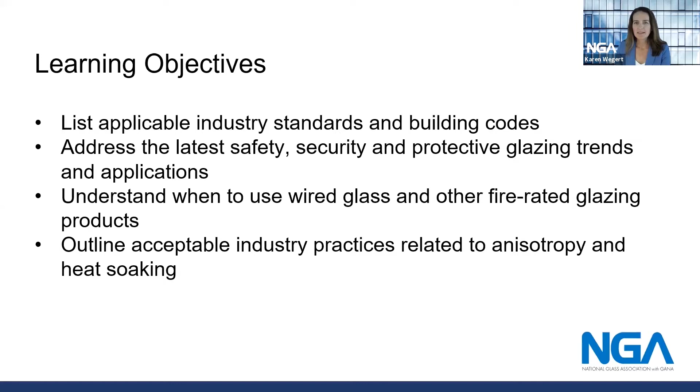This session is all about glass, questions from architects. We asked our NGA member companies what questions they hear most often from the architects they work with. These questions encompass a wide range of topics, including building codes, safety glazing, how to select the right fire-rated glass, and understanding anisotropy and heat soaking of tempered glass.

Please allow me to introduce to you the NGA advocacy and technical team who will be responding to your questions today. Tom Zaremba of Roetzel and Andress is NGA and GICC's fire, structural, and safety glass consultant. Tom has more than 30 years of experience representing Fortune 500 companies in civil litigation and financial institutions in restructurings, reorganizations, and insolvency proceedings. Tom's practice focuses on advising and representing clients in all aspects of the development of building codes and standards, including proceedings before the US DOE, the US EPA, the International Code Council, and numerous other forums.

Next, Dr. Tom Culp is the owner of Birch Point Consulting, located in La Crosse, Wisconsin. After earning a PhD in chemical engineering from the University of Wisconsin, Dr. Culp has spent the last 21 years in the glass and window industry in the areas of energy efficient glazing and window performance, low-E glass coatings, and building code development. He currently represents the National Glass Association, the Glazing Industry Code Committee, and the Aluminum Extruders Council on Energy and Green Construction Codes.

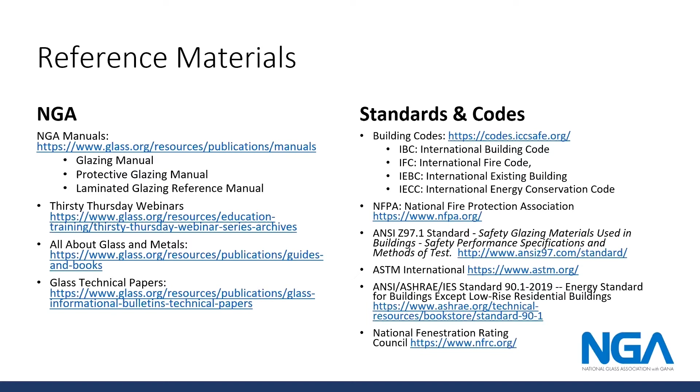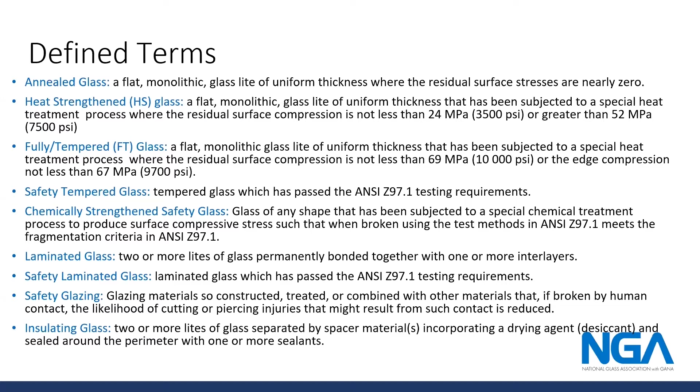We will be referencing many sources today, so we've compiled them all here for you. You received this in your digital handout before the conference, so feel free to refer back to that, and these are all live links that you can use to go directly to these resources as we talk through them. We also compiled a list of terms that are commonly used in the glass industry and how those are defined. So we won't go through those one by one today, but feel free to look back to your digital handout whenever you need to refer to these.

All right, let's get to our questions now. Our first question is, where can I use wired glass and where is it not allowed? Good morning, Karen. This is Tom Zaremba. I think I can probably answer that for you.

Wired glass can be manufactured in many different ways, but there are 2 primary ways when you're trying to resolve the question of where can I use it and where I can't use it. One is in its monolithic form, and that is simply rolled wire glass, which consists of annealed glass with a wire mesh embedded in the center of it. Another way to manufacture wired glass is to apply an organic film to either one or both sides.

And if you have monolithic wire glass, you have to be very cautious with it for the reason that it will break safely only if it is impacted at 100 foot-pounds or less. That's not a great deal of impact. The two categories that ANSI Z97.1 uses are 150 and 400 foot-pounds of impact force. So if you're going to try to use monolithic wire glass, you have to remember that it's banned in any hazardous location.

Excellent. Thank you, Tom. Our next question is, what is anisotropy? Is it inherent in the process? So Karen, I'll take this one. So anisotropy is also known as iridescence, and it's the same as strain pattern and quench pattern. Anisotropy, the word itself, is more of a European terminology.

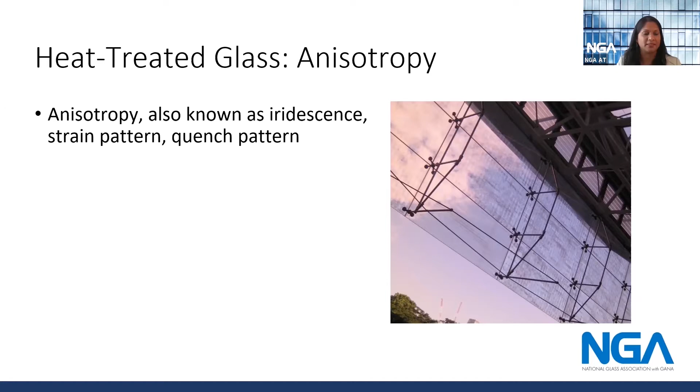So is it inherent in the process? Well, in order to understand that, you kind of need to know the heat treating process. So the heat treating process is when you take the annealed glass and heat it up to approximately 1150 degrees Fahrenheit. And the reason why you do so is in order to get the required resistance to the thermal and mechanical stresses, so that way you have safety glazing in the tempered glass.

So after it's heated up, it needs to be quenched down to cool down the glass. During the quench process, the air is supplied through nozzles or slots to the glass surface. So differing levels of stress on the glass surfaces can occur during the quenching process. And also if there's non-uniform heating in the furnace, it can also contribute to the iridescence or the quench patterns. So that's why when you look through certain types of lighting conditions, you're able to see lines like you have on the screen, or sometimes you're able to see dots on certain different conditions.

So that is anisotropy. So is it inherent in the process? Because it's the way you're able to capture the stresses into the glass, that's why it's always going to be inherent in the process. It's a characteristic of all heat treated glass. And it should not be mistaken as discoloration or non-uniformity of the tint or the color, and it's not a defect in the glass. The strain pattern does not affect the physical properties or the performance values of the glass itself either.

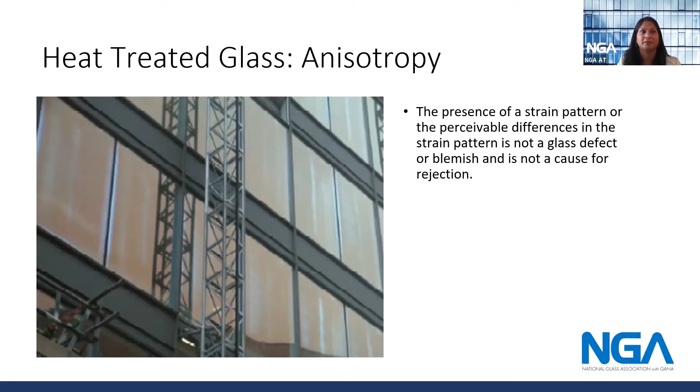In addition, NGA has a document on the iridescence in heat-treated architectural glass that discusses this phenomenon, as well as goes through the different standards that talk about the viewing conditions and what's acceptable and what's not.

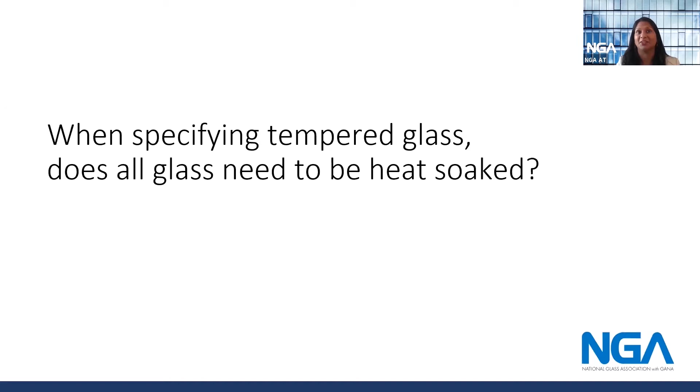Thank you, Ermela. You may want to take this next question too. When specifying tempered glass, does all glass need to be heat soaked? So heat soaking, a very controversial topic. It's important to know heat soaking in glass. So there's basically two testing approaches. Some people require each lite to be tested, whereas others use a statistical approach. So the statistical heat soak testing involves a statistically significant number of glass panels to be tested, as opposed to 100% for a project.

It is important to recognize there isn't a consensus on whether you should have 100% testing or just a portion. So heat soak testing is done on fully tempered architectural glass. It can be done on clear glass, tinted, low iron, patterned, or any type of coated glass. Within North America, there isn't a test standard. However, there's a European standard, EN 14179, that talks about two different types of heat soak. There's inline heat soak testing, and then there's also batch testing.

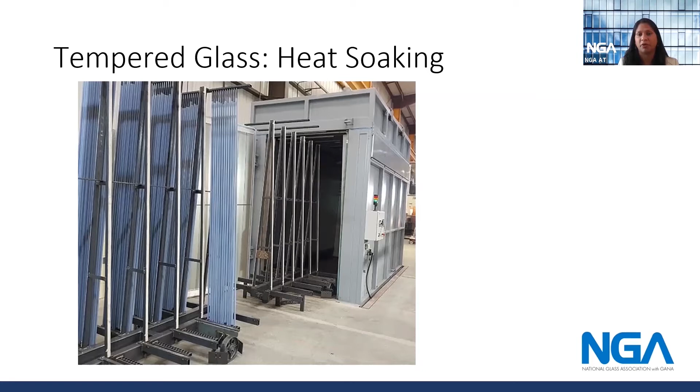In the industry, heat soak is not a guarantee that you're not going to have spontaneous breakage. The idea of heat soaking glass is that if there is going to be some type of spontaneous breakage due to inclusions in the glass, it will break during the process instead of on the site. As you can see on the screen, you have some photos of an actual inclusion with some breakage of the tempered glass, and then you have the oven and how it's being used as well. So that's all about heat soaking.

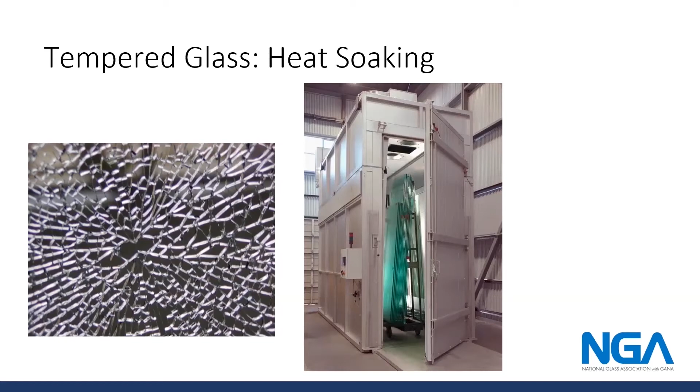So in addition to the information, NGA also has a heat soak technical paper that's on your screen. It talks about the different types of heat soaking, when you should and shouldn't heat soak, as well as some information on the actual batch process itself.

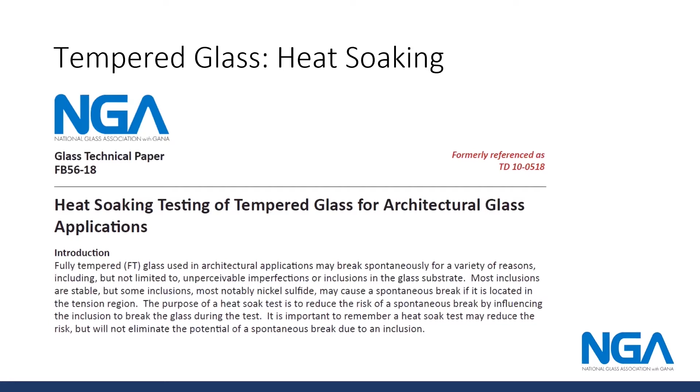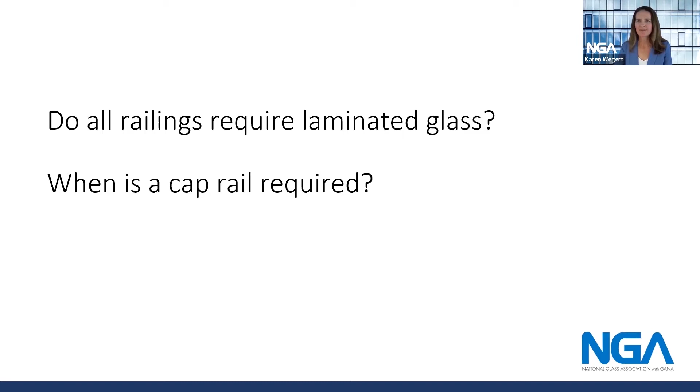Thanks, Urmila. Okay, let's switch gears a bit to a new topic. Do all railings require laminated glass? And when is a cap rail required? I can take that one as well, Karen. The first thing you have to realize is that when you're talking about railings, you're really talking about a defined term that's used in the International Building Code. And that defined term is guards.

It also defines as a term handrails. The term railings doesn't appear anywhere in the code, so just keep in mind that even though it's an industry term, it really refers to a defined term in the building codes as a guard. And the answer to the question, do all railings require laminated glass, or do all guards require laminated glass, is yes and no.

The answer is yes, because Section 2407.1 of the International Building Code requires all glass anywhere in a guard or in a handrail to be laminated and to be fully tempered or heat strengthened glass, which meets either 16 CFR 1201 Cat 2, which is a 400 foot-pound test, or ANSI Z97.1 Class A impact testing, which is also a 400 foot-pound impact test.

The reason that the answer is also no is because there's a single exception to the requirement that all guards and handrails be laminated. And that exception provides that single fully tempered glass may be used in a guard or a handrail so long as there is no walkway beneath it, or if there is, that the walkway is permanently protected. And the reason for this is the potential for, as Urmila was discussing earlier, spontaneous breakage of fully tempered glass.

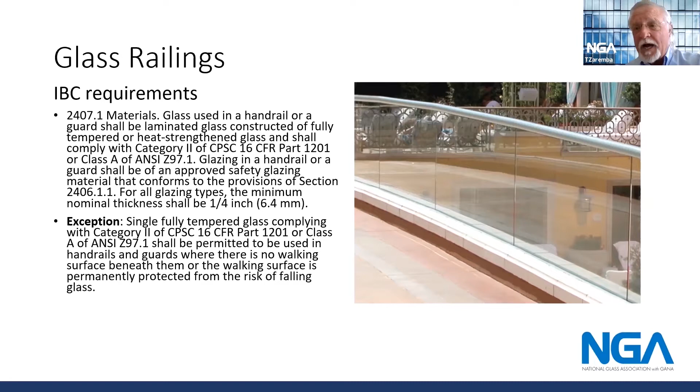Now, the next question was, when is a cap rail needed? There are several types of guards with glass used in them, and one is an infill panel, and the second is typically called a baluster panel. Where an infill panel is used, the glass is in a non-load bearing position and is supported by fixed posts or rails. So the code does not require a top rail when you're dealing with glass that is structured into a guard assembly as an infill panel. That is, it is not load bearing and it is supported by fixed posts and rails.

However, in the situation where you have baluster glass, either panels or other types of glass balusters, the code requires that there be a top rail or a handrail at the top of the balusters that attaches to at least 3 balusters. Now, there's only one exception to that rule, and that is if the baluster is laminated and has been tested to remain in place after impact or breakage pursuant to ASTM E2353. So top rails are required in glass balusters. They are not required in infill panel guards.

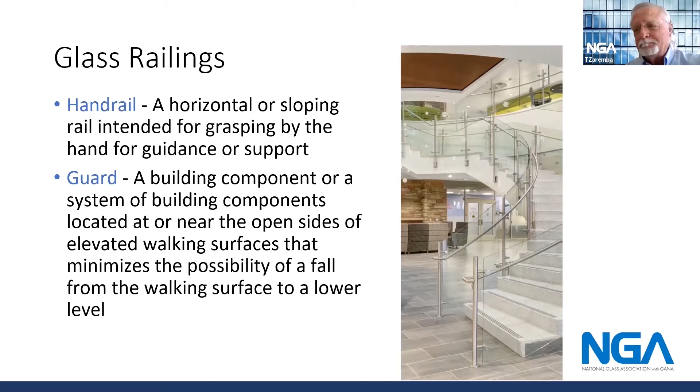Thank you, Tom. Thanks for clarifying that. This next one is a bit tricky. How do I apply the factor of safety for handrails and guards? Do I apply the factor of 4 that they talk about to the 200-pound load or the 50-pound load? How does that work? Okay, let me take a stab at that one as well, Karen.

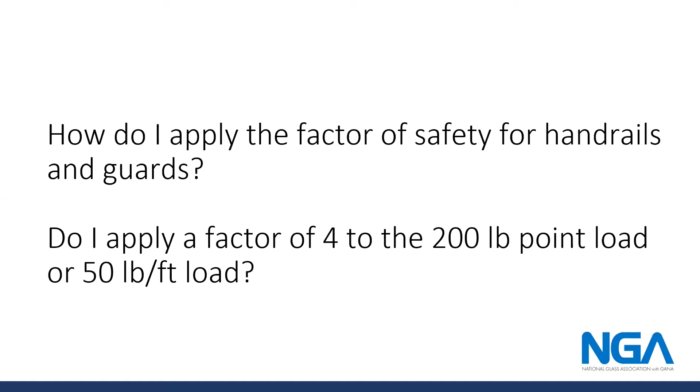Glass guards and handrails under Chapter 24 of the Building Code are required to meet the requirements of 1607.8. And 1607.8 requires that the glass in guards and handrails be designed to withstand a linear load of 50 pounds per linear foot and a concentrated load of 200 pounds. Now, Chapter 24 swings back after you are aware of those Chapter 16 requirements and says, by the way, you have to design the glass to have a safety factor of 4. But when you design the glass, you do not apply a factor of 4 to the design loads.

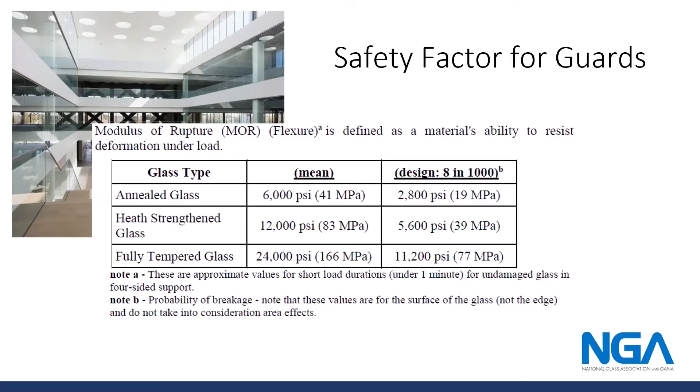Instead, the glass should be analyzed for each load, both the linear load of 50 pounds and the concentrated load of 200 pounds, separately. And the resultant stress should then be compared to the glass strength values, which are published by NGA in a document, FM 05-12-2018. And then those values, as specified in the NGA document, should be divided by 4. So the design stress should be compared to 6,000 PSI for fully tempered and 3,000 PSI for heat strengthened.

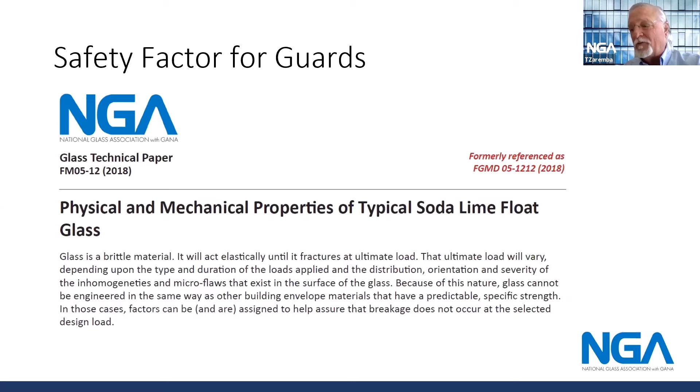As to any other types of materials that are used in the guards, they do not require a safety factor of 4. So if there are concrete, steel, or aluminum components to the guards, those must meet whatever requirements there are in the code for those types of materials in Chapter 16, but they do not have to meet a safety factor of 4. Only the glass in the guard or the handrail needs to meet the safety factor of 4 requirement.

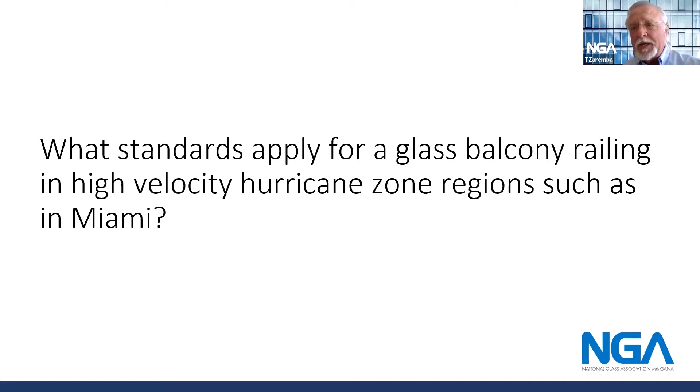Thanks, Tom. Our next question is also about railings. What if the glass is in a balcony railing, for example, in Miami? What do we do then? All right, so Miami's kind of an unusual place. It has windborne debris requirements, and you could have glass guards like this one in exterior applications. But what the code wants to prevent in high wind load areas is for glass handrails on these guards to become windborne debris missiles. As a result, Chapter 24 requires the glass used in exterior handrails and guards to be laminated and comply with Cat 2 requirements of 16 CFR 1201 or Class A requirements of ANSI Z97.1.

Additionally, if the top rail is attached to any other glass in the guard, that other glass must meet the windborne debris impact requirements that are specified in section 1609.2 of the building code. Those are specified for windows and other openings in buildings, but are made applicable to glass in contact with handrails in exterior applications through Chapter 24 of the building code.

I've got a follow-up question for you, Tom. For wind loading on the glass balustrade, do you consider the positive and negative simultaneously? It's an interesting question, and frankly, I'm not aware of any building code provision specifically on this point, but what I can say is that glass balusters can differ in design from vertical posts or columns, which have far less surface area for wind to act on than if a flat glass baluster panel is used in a guard.

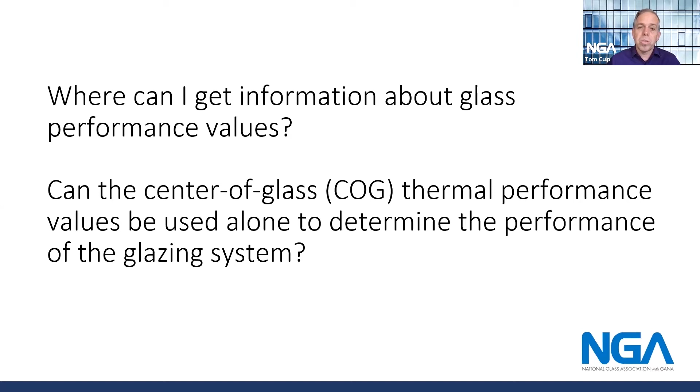Thanks, Tom. Our next questions deal with more on the energy side of things. First of all, where can I get information about glass performance values? And can I just use the center of glass performance values? Okay, so now we're in the area where I spend most of my time, which is energy performance and green building codes as well. So as most people know, the primary energy related performance numbers or metrics that involve glass and windows are the U factor and the solar heat gain coefficient.

And besides, the manufacturers will provide a lot of that data on the glass and the glazing unit in terms of the performance in different configurations, whether it's monolithic or double glazing or triple glazing. Another good source is if you look back in your handouts at the reference materials, there's a link there for the All About Glass and Metals guidebook. And there's some information in there about the different metrics and just general information. But generally, you'll get glass information from the manufacturers themselves. But that is generally for the glass.

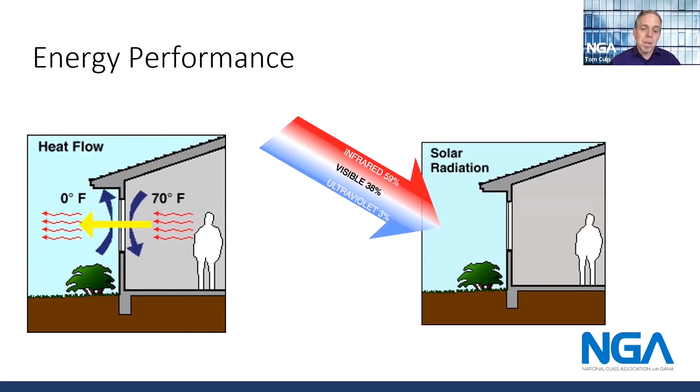And so the second question was, can you use center of glass numbers? And the answer is no. For the energy codes, all the U factors and SHGC requirements are for the whole assembly, the whole window, including both the glazing unit and the framing. And that's because if you ignore the edge, if you ignore the framing part of it, you will miss out on a lot of the impact on thermal performance, as well as other issues like condensation resistance. And so you need to be looking at not just good glass performance, but also the framing system and the spacer system, and looking at things like thermally broken frames and warm edge spacers. And you have to look at the whole numbers for that.

The next question is, where do you get those numbers for the whole system? Because it's easy to find one or the other, but what about together, especially in a case where the framing system is coming from one supplier and the glazing system is coming from a different supplier. And it can be challenging. But often the best source in that case is to look to the supplier of the framing system or the complete window system, whether it's a curtain wall, a window wall, or a unit window. They will often have information that with their framing system, if you combine it with a glazing system with a certain center of glass value that you got from the glass manufacturer, that'll give you an overall number.

And most of the framing system manufacturers have that information on their website, and some of them even have online calculators where you can go on, plug in your center of glass U factors, and for their particular window wall system or curtain wall or whatever, it'll give you the whole product numbers. And that's what's required for complying with the energy codes.

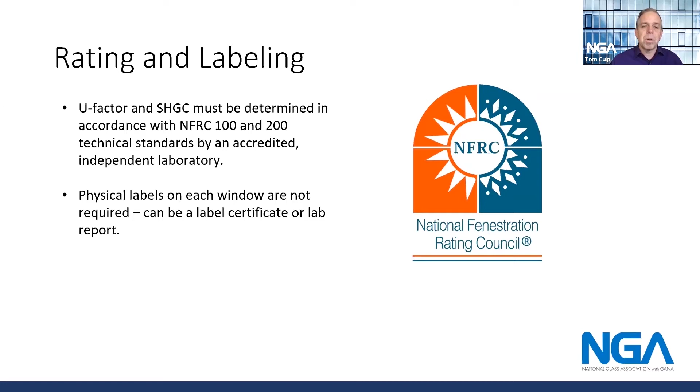Gotcha. Our next question is a bit more specific. So if I'm looking at a multi-cavity IGU, on which glass surface should I place the low E coating in order to optimize the solar heat gain coefficient?

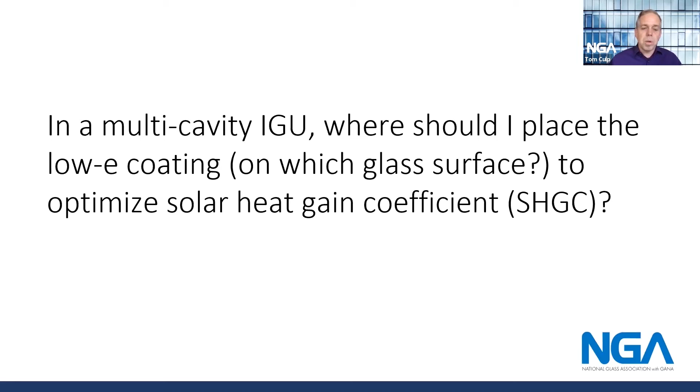I will note that you can use multiple low E's. It's becoming more common to also put an interior low E coating on the number 4 surface, and that's not there to control solar heat gain. That's there to lower your U factor even a little bit more, and that coating is durable, so it can be used on the side facing a room.

Now, in triple glazing, if you're going to use 2 low E coatings, there's different ways you can do it, but the most common configuration is number 2 and number 5. So that's the most outboard lite and the most inboard lite, but on the surfaces facing the cavity. A bit of warning, generally it's not recommended to put the low E coating on the middle lite, either on the number 3 or number 4 surface.

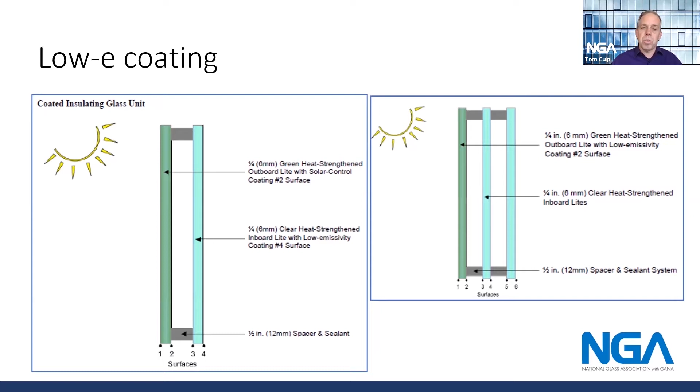It can be done, but you have to be very careful about examining thermal stress when you put a low E coating in that position. And so generally it's better to avoid that. If there are scenarios where you want to do it, make sure to work with your glass manufacturer, go through a thermal stress analysis, and make sure it's appropriate.

Thanks, Tom. Next, a little bit controversial question. Are there limits on the glass area, and is New York City banning glass? We already kind of know the short answer to that, but maybe you could elaborate a bit. Yeah, we've been hearing a lot about this. There were some statements made in the press last year, some of them a little over the top, that they're banning glass buildings in New York City. And the simple answer is no. No, they are not in any way, shape, or form.

Now, what the codes do say about window area is that if you're following the prescriptive path, so that's a more simple building where each component of the building has to meet a certain code requirement, that prescriptive path is limited for use only in buildings with 40% window to wall ratio or less. But you can use higher than that. You can use as much glass as you want in the performance path, as long as you show the overall building meets the required level of energy performance.

And so the short answer is no, there are no limits on window area. But to achieve your energy performance goals, this is not the place you want to be value engineering. You do want to make sure you're using high performance systems with good low E, good thermally broken frames.

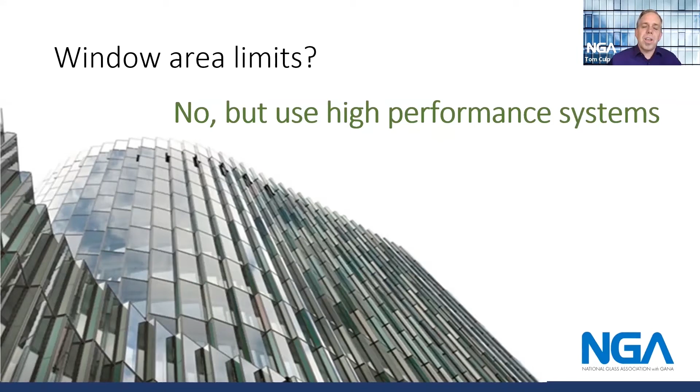There are now commercial warm edge spacers and gas fill and systems that can be used and should be used in all these applications. The other comment is some of where this talk came from is there's something called an envelope backstop. And this is not everywhere, but it is being used in New York City as well as Washington State.

And what that means is when you do a performance analysis, because you do want to build a highly glazed building for all the benefits that glass brings in terms of health and wellness to the occupants from daylighting and view. If you want to do that, you have to show the building meets a certain desired energy performance level, and the envelope must meet a certain performance level. And again, that's no problem for doing a highly glazed building and bringing in all those benefits of daylight and view. But you do need to be aware of both.

And it's a new concept. It's not used everywhere. But we did write an article about this because it's kind of a new idea. And so if you look in Glass Magazine in the April edition, there's an article talking about some of the details regarding these envelope backstops. But the bottom line is there are no window area limits, but you do need to show energy performance and use good systems.

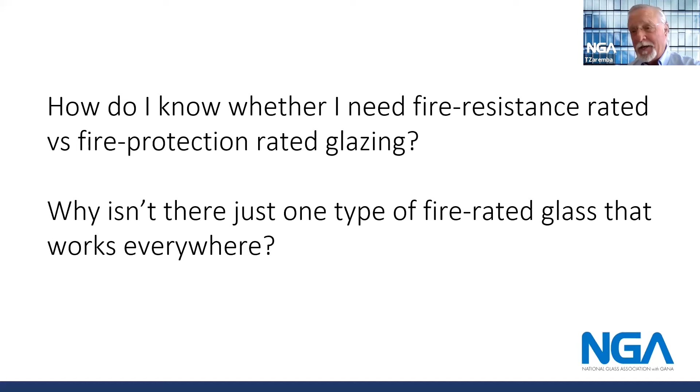Excellent, thank you. All right, switching gears once again. Here's a frustrating one. Why isn't there just one type of fire-rated glass that works everywhere? How do I know which type I need? I'll take that one, Karen, if it's okay with you. First of all, how do you know which kind, fire resistance or fire protection rating, to use? That's a good question. And there's really one answer, and you really have to know what the answer is in order to know the answer to the question.

That is, you need to know to go to table 716.1(2) if you're dealing with a fire door or a transom around a fire door or a sidelight around a fire door. If you're instead dealing with a window, you have to go to table 716.1(3).

The reason I point those out is because the answer to the question is difficult and it's spread out through the entire code. The glass industry spent about 10 years specifying each and every fire resistance wall rating that exists anywhere in the code, and it tells you exactly what kind of glass, either fire protection rated or fire resistance rated glass, you can use and in what sizes and in what quantities, all set out in those two tables in 716.1(2) and (3) of the code.

Now, let's back up just a little bit. So you're going to those sections of the code to find out the answer to your specific question: what kind of glass do I need, fire resistance or fire protection? What's the first thing that table is going to ask you? It's going to ask you, what kind of a fire resistance wall is that glass going into? Is it going into a firewall? Is it going into a fire barrier? Or is it going into a fire partition? Because the answer to the question will depend on what kind of a wall it is being put into.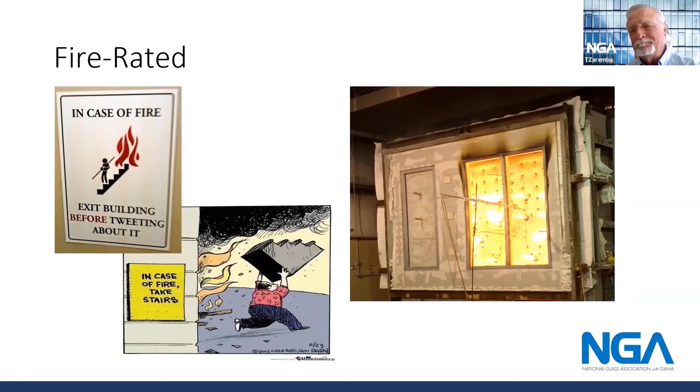Thanks a lot, Tom. Our next question: what if I'm replacing a piece of broken glass? Can I replace it with similar glass, or do I have to bring it up to the current energy code standards? Well, thanks, Karen. That's a fairly straightforward question.

Glass-only replacements are considered repairs. A glass-only replacement does not have to meet the current energy code under the International Building Codes. However, under ASHRAE 90.1, if the jurisdiction follows that, the U factor and the solar heat gain coefficient must be the same or lower than it was before. Now, I caution you, that was the glass only.

Now, once we get into sashes or the full window, then we're talking about a whole other set of rules. If you're going to replace a whole sash or a window, it has to meet the requirements of whatever code that jurisdiction is following. If it's the most current code, then you have to follow the most current code.

But pivoting back to ASHRAE, if it is an ASHRAE 90.1 jurisdiction, it will allow 25% of the entire window area to be replaced with similar U factor and solar heat gain coefficient, or a lower U factor and solar heat gain coefficient.

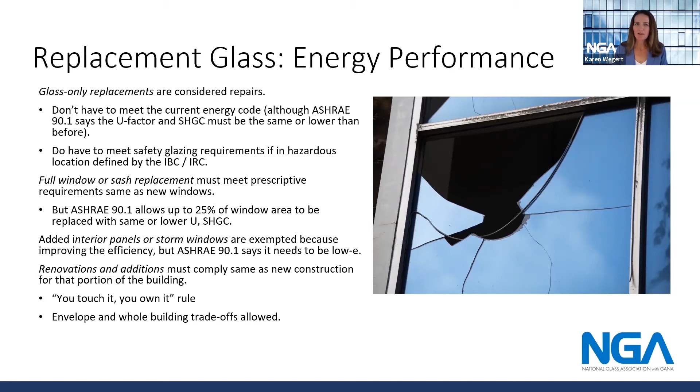Gotcha. So this next question is similar, but referring now to the safety standards. For example, if I'm removing and replacing a shower enclosure to retile or seal it, do I have to bring the glazing up to the current safety code standards? Well, that seems like a very straightforward question, but it really isn't. And I'll explain to you why.

And when I do that, I'm going to draw on some unique experience I have, because not only do I participate in the code formulation process that we do for GICC and NGA, but also I litigate cases where we see the end result, usually when somebody's injured or a construction defect case.

So again, going back to, you need to look at whatever jurisdiction you're in. The US is an interesting place. You have some jurisdictions like Tom Culp referenced, New York and some of the coasts, that have very different code adoptions as opposed to somewhere like where I am in Ohio, where in the rural parts of the state there are places that literally have zero building codes.

With that being said, we're talking about safety, and the whole point of codes is life safety. You need to be sure that we're keeping that in mind when we're replacing something even as simple as a glass shower enclosure. The IBC says that if you replace something in a hazardous area, which a shower is because there's water and moisture, which would also go towards hot tubs, pools, anything with water.

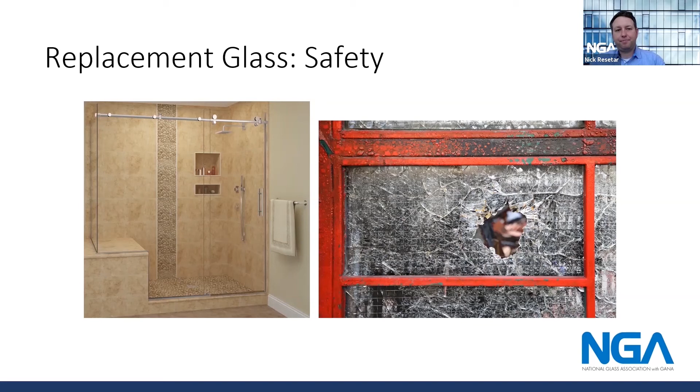Absolutely. Thanks, Nick. I'm definitely convinced. Our next question, what are the building code requirements for security glazing for protection in schools? I'll take that one, Karen. The short answer is that the building codes do not offer any security glazing requirements. The codes require safety glazing in various applications. However, for security glazing, it's voluntary.

There are several voluntary standards for security and protective glazing for schools and other buildings. There are some for window and door frames only. There are some standards for glass only. And then there's some for glazing systems. NGA just published a glass technical paper on security glazing for buildings, including schools, commercial buildings, medical facilities, public buildings, buildings of worship, and other building types.

It's important to realize when you're designing a building, it's important to determine what your threat is. What is the risk associated with this specific building type? And so based on the level, there are standards that you can use. There are several standards that have basic safety glazing, which includes accidental human impact. There are some enhanced standards about forced entry or burglary resistance. There are some additional standards that have forced entry and ballistics, and even ballistic protection standards. But again, those are voluntary.

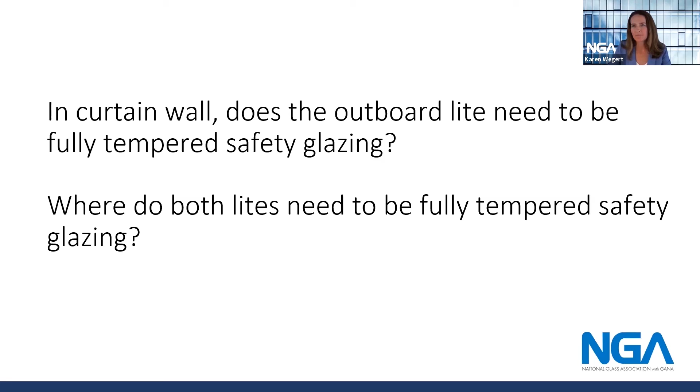Thank you, Irmela. Okay, panelists, we have one final question, and that is, in curtain wall, does the outboard light need to be fully tempered safety glazing? And where do both lights need to be fully tempered? I'll take this one, Karen. I've had this question come up multiple times, just even in recent months. As Nick was talking about earlier, the building code defines hazardous locations where you're required to use fully tempered safety glazing, or it could be laminated safety glazing as well. And that's in chapter 24.

Now, with regards to curtain wall, especially floor to ceiling type glass, the main provision is if it's big enough, so it's greater than a certain square footage, and the bottom of the glazing is close enough to the floor, 18 inches, and it's adjacent to a walking surface, like a corridor or an office, then it has to be safety glazing, and that's pretty clear. But the question that comes up is, does it need to be safety glazing on just the inboard light, or both lights in double glazing, or all the lights in triple glazing?

And there's an exception that addresses this. So it's very clear it has to be safety glazing on the inboard light, because that's where you could slip and impact the window. Now the outboard, there's an exception 3, and it specifically talks about this. It says that the outboard light does not have to be safety glazing if the bottom edge of that glazing is 25 feet above the adjacent walking surface. That could be a sidewalk down on the ground floor, or it could be a walking surface on a roof deck area of the building up above.

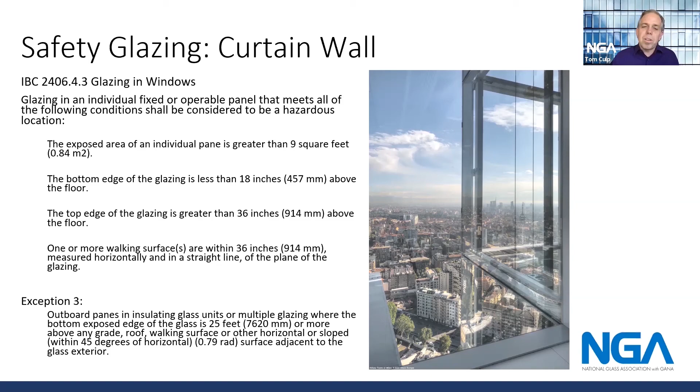Excellent. Thank you, Tom. And thanks to all of you, both Toms, Nick, and Irmela, for answering all these questions.